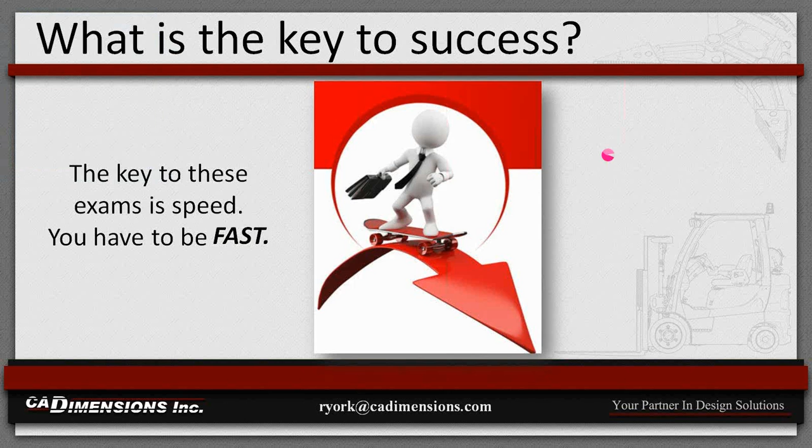And here's the thing about being fast. When you're trying to be fast, sometimes the first thing you do is you kind of start to cut corners. And we have to remember that the key component of speed, the key component of fast modeling is you have to be patient and you have to do it right the first time.

That's what we're after. So I'm going to teach you kind of a 4-step process, how I take my tests and how I help myself ensure that I get it right the first time. Okay.

So step 1 is going to be design intent. And when I say design intent, what I'm after is I want you guys to read through the entire question set. It depends on how many questions it could be. This part alone, just reading the question set, this could take you 3, 4, 5 minutes.

And the reason I want you to read through the question set is because what happens here is they're going to give you a model. They're probably going to start with something pretty simple, actually. And then they're going to mimic the design process, and they're going to complicate it over time. So when they complicate this thing, you have to kind of know where you're going. It's more important to know where you're going than where you're starting.

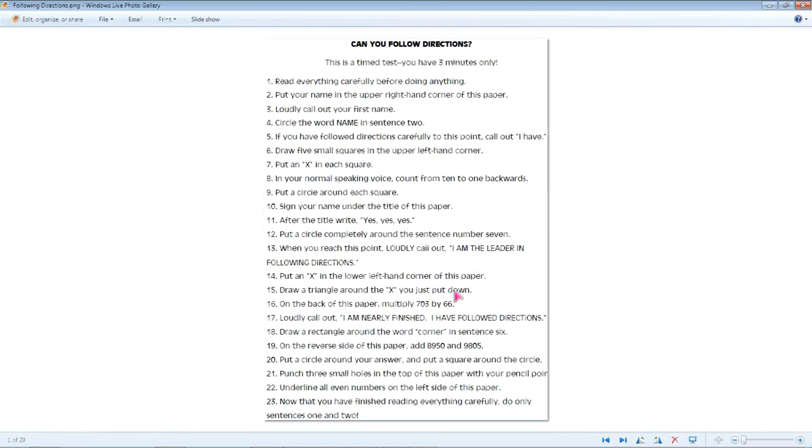So remember, think back to, I don't know, like 7th grade, 6th grade maybe, whenever you did your first real science experiment, and the teacher gave you a lecture about following directions and how it was super important that you read them all the way through the first time.

Same concept here. So I was the kid who got this test after that follow directions lecture, and step 1 is read everything carefully. But then at step 13, I had forgotten about that, and I was bored, and I started screaming in the middle of my classroom that I was the king of the universe. And then I realized when I got to the end that all I was supposed to do was put my name on the paper and be quiet.

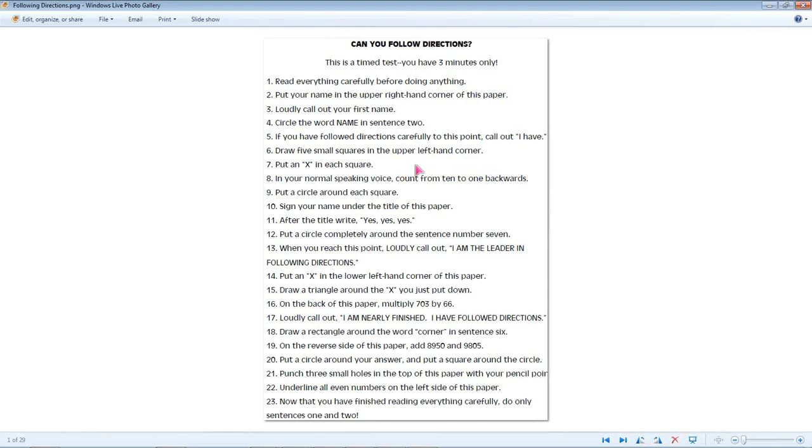So I don't want you to be the guy in the middle of your office that starts screaming at SOLIDWORKS because you didn't see the curveball coming. So read through the entire question set and know what they're going to ask you at the end.

Step number 2, I want you to input all possible information. They're going to give you a box, which is length times width times height. A, B, and C are going to be your variable values. When they give you A, B, and C, use your equations folder and set up global variables for those so all you have to do is change that box. Like I said, we're going to do a live practice test and look at that.

When you input this information, the other key factor is you need to make sure you get your materials properties in the part file.

I showed you 2 weeks ago where I had a really hard time with the mold tools test. When I took this test the first time, I had a hard time with imported model repair. Second time too. Third time, I knew imported model repair, I knew how to do it, my model was perfect. But I got so excited that I knew the content that I forgot my procedure and failed to assign a materials property to my part. So no matter how good my model was, my answer was incorrect because they asked for mass and I had failed to assign material to it.

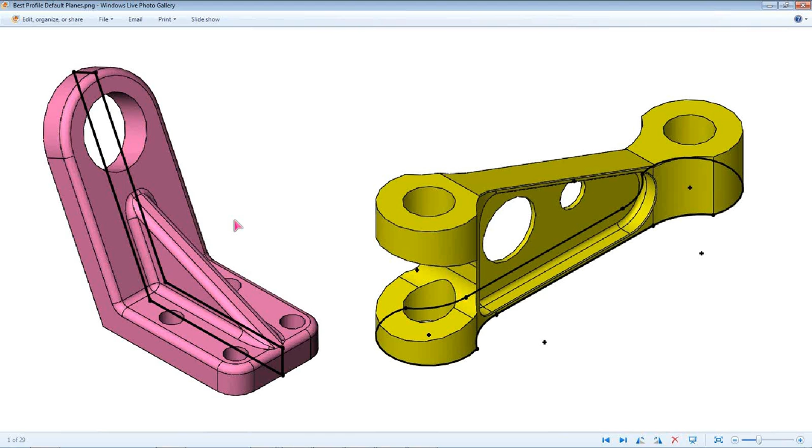And the second part of this is your default planes. When you put this in SOLIDWORKS, I don't want you to waste any time in translation. So if they give you an isometric view, make sure you match it. For this gold one, start on the top plane. For this purple one, start on the front plane. Make sure that you are literally just copying the information they give you so that you don't lose time trying to translate your front sketch to their top sketch or vice versa. Just copy the information they give you. It'll save you time later on.

Finally, 10 minutes into the test, you can begin construction of your model. When you construct your model, I want you to extrude everything you can first. Extrude, extrude, extrude all the solid material that you can. Once that's all created, start making your cuts, start removing stuff - cut, cut, cut, maybe use your hole wizard tool if you need to. Then, once all that's done, fillets, chamfers, that kind of stuff. Add your applied features at the end of the tree.

The reason I show you these is because when I bring up my practice test, some of you are going to look at it funny and say, that's a really easy practice test. And that's probably true - my model is not complicated. But I didn't want my model to be complicated. What I want you to get out of the next 30 minutes isn't how to be the best, most complicated model maker ever. I want you to get the test down. I want you to see how the process I've set up is going to help you be successful at the test-taking part of this.

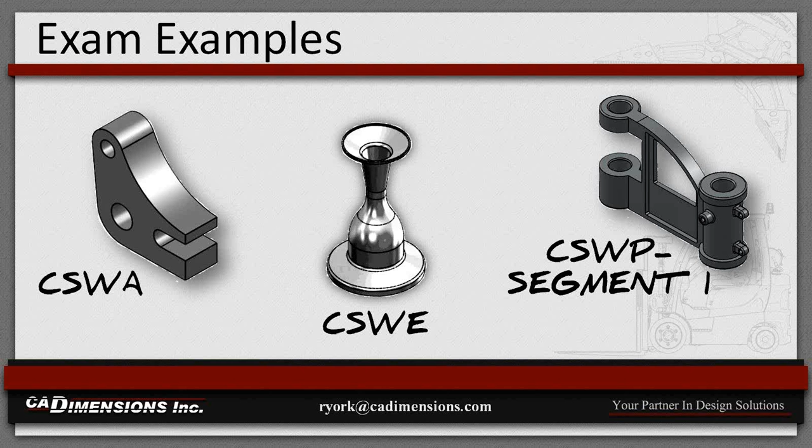And so I'm going to go ahead and bring that up. I'm going to bring up SOLIDWORKS.

So the place we're at in time right now is we have gone ahead and purchased our CSWP. We did that with our subscription services voucher, and we've logged into our proctor, and we've gone ahead and chosen that test to start and hit the play button.

When you do that, you're going to get a welcome screen. Welcome to your test, here's some information about it. Your exam is 5 questions, you can answer them in any order you prefer. Once you click End Test, you can't go back. I think that's awesome. And the way this one is structured is 5 questions, 20 points apiece, and we need to get 4 out of 5 correct in 30 minutes to pass. The reason I structured this test this way is because that's how every single practice test I found online was structured. So whenever you're looking at these practice exams, they're all pretty much going to be built the same way - 4 out of 5 in 30 minutes or less.

The other part of this is I have a timer, and we are going to time this, make sure that we're good to go. So 30 minutes on the clock, we're going to go ahead and start this thing up and see how we do.

We're going to start that. First rule: read through the question set, see where you're at. So we're going to start the test, and we're going to look at the questions.

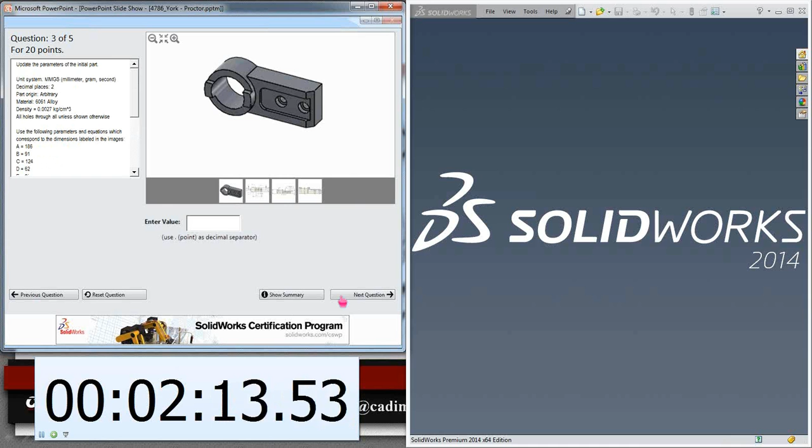For question number 3, you won't believe it, it's the same model again. All they're going to do is update those variable values. Okay? So same model, questions 1, 2, and 3.

Questions 4 and 5 is where it gets fun. This is where it gets interesting. So for question 4, this is where they start mimicking that design intent, or that design process, excuse me.

So what the instructions here are going to be: modify the part using the following dimensions. They're going to give you some detail views of where they made these changes. And then they're going to give you new variable values.

And this is not a reading comprehension test, okay? So whenever they change something about these drawing views, they're going to make sure they tell you. So in this case, hey, by the way, the equation for y has changed. They're going to make sure they tell you that.

And the question, again, is going to be measure the part after you make all these changes. What is the weight in grams? Okay. And then question 5, another multiple choice question. So that lets you know that question 5 is going to build upon it.

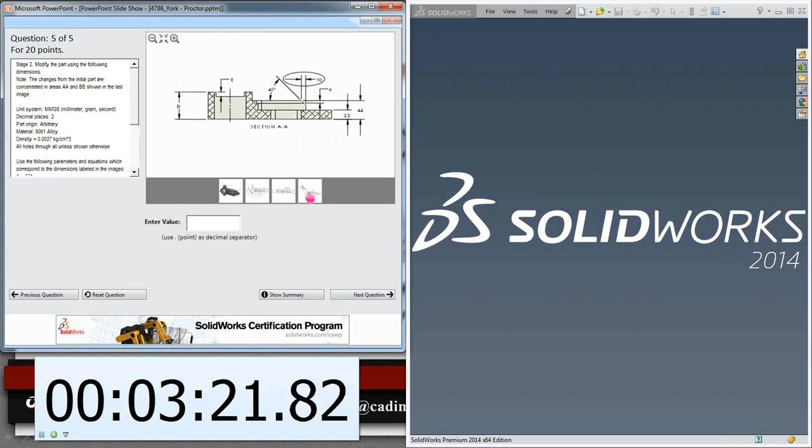And question 5 is going to be fill in the blank. Same part as question 4. And we're just going to make those variable changes and move on.

When you read through your question set, it is super important that you take a look at the summary screen. So the summary screen, in this case, is just an image. Obviously, we haven't answered any of the questions yet.

But how this works is going to show you a state. So is it answered or unanswered? And more importantly, it's going to show you how the questions are weighted.

So if you have a 5-point question and several 30-point questions, take the heavier questions first. Start with those models. And the reason being is you want to set yourself up for success. If you waste too much time on those 5-point questions, then you don't have time to finish the 30-point questions.

So start with the heavier weighted portions of the test, and we're going to go back to question number 1, and we're going to start the rest of our process.

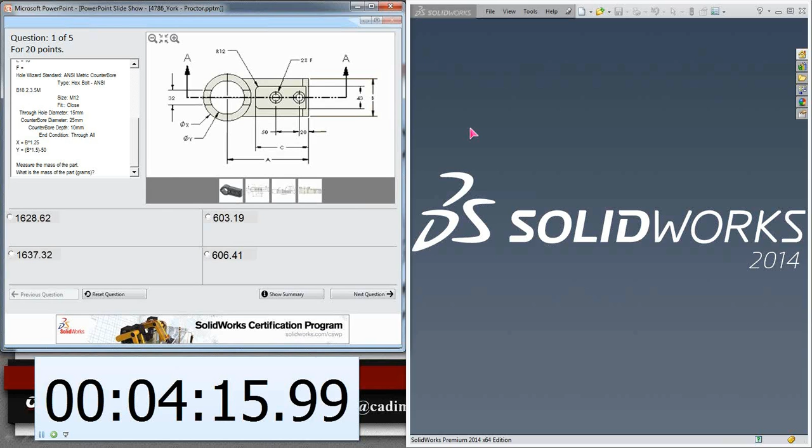So step 1 was read through the question set. We did that, it took us 4 minutes. Step 2 is going to be to create our part and then input all of that variable information they give us. So we've started our part.

Where do we put that variable info? So what we're going to do is I'm going to kind of scroll this back up and look at my variables. And under my equations folder, I'm going to right-click.

And I'm going to say Manage Equations. This is where I'm going to set up those variables.

So A is going to be 172. B is going to be 77. C is going to be 104. D is 62. I'm just using the tab key on my keyboard, by the way. So F, I can't put in here - I can't put the variable for F in here because it's a hole wizard hole.

But I can input X and Y. So X is going to be B times 1.25. And Y is going to be B times 1.5 minus 50.

Okay, and if we remember right, that equation for Y changed at question 4, right? They told us - they put a note there. So if you're really paying attention, if you're really on the ball here, you can say this changes at question 4. Just kind of give yourself a reminder. We're going to say OK.

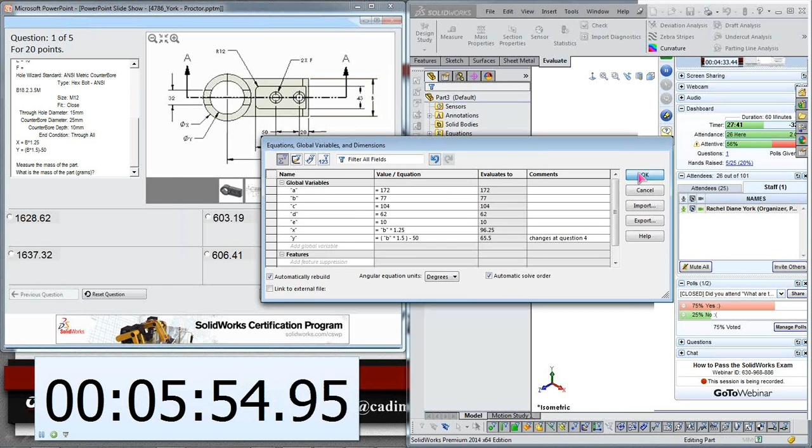So we've read through the question set. We have input all of our variable information. We need to apply a material. So it was 6061, if I remember right.

I'm going to come back to my proctor, kind of move around there. 6061 happens to be in my favorites, so I'm going to assign that and save the part. That's the last step of the input process.

I'm going to save this as - I went ahead and set up a folder before I started taking my test. You can absolutely do that so you have a place to save all this stuff. I'm going to save this as question 1.

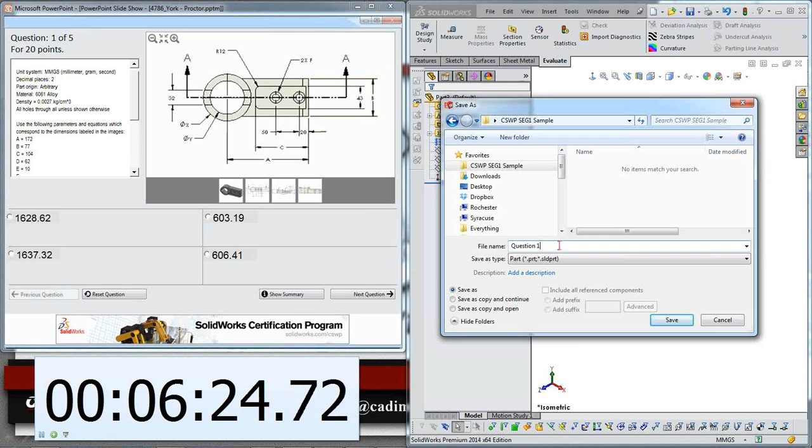Okay, and now I'm going to talk about best profile. Where should I start? I'm going to start with the cylinder. I feel like that's the easiest way to do it. They gave me an isometric view, so what I'm going to do is copy that isometric view.

So I'm going to start on the front plane with my cylinder, start a sketch. I'm going to use my mouse gestures for this, guys, so I'm going to right-click, drag, and start my circle. And I'm going to make this cylinder, the outside, equal to that variable of X that we created.

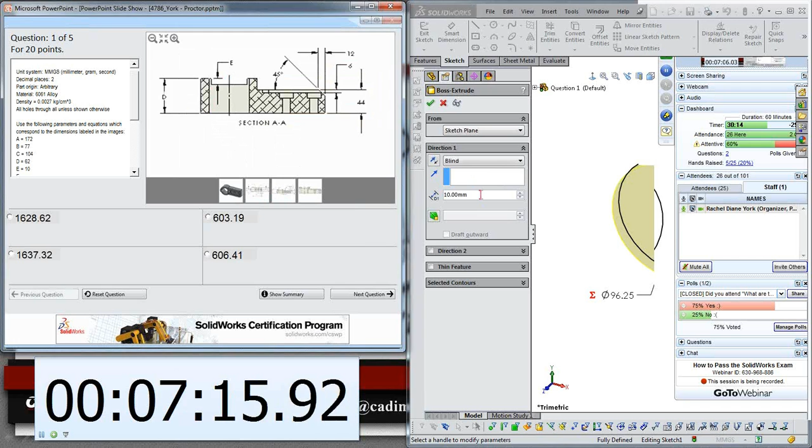Say OK. And now I'm going to go ahead and extrude this up. I have to go back to the proctor, and I have to figure out how tall that cylinder was. So that cylinder was equal to that variable of D. We're going to say OK.

And when we're constructing things, all of our solid material first, right? So I'm going to start another sketch back here. Draw what you want. Make sure you relate it, and then put your dimensions on it. So I'm going to make this midpoint, make sure that it's symmetrical. And then I'm going to put my dimensions on it. This is going to be A, so equal to A.

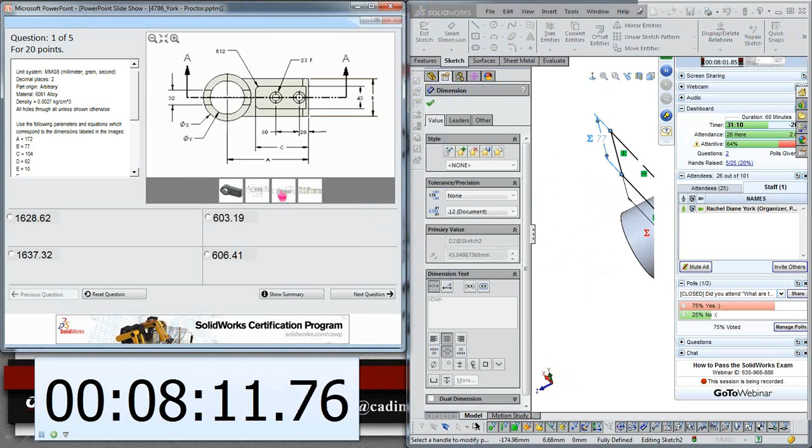And then if I move this over, this is going to be equal to B. Okay, we're going to extrude that up. I don't remember how tall it was, so I got to go back to my proctor, check that out. So that's how this works - you're going to be back and forth between SOLIDWORKS and your proctor.

Okay, and now we have all of our solid material that we need, so it's time to start making those cuts. Again, I'm going to start with the easy cuts - I'm going to start with the cuts on this cylinder. So I'm going to start a sketch here. All cuts are through unless otherwise specified. So I'm just going to draw my circle in here. I'm going to make this equal to Y.

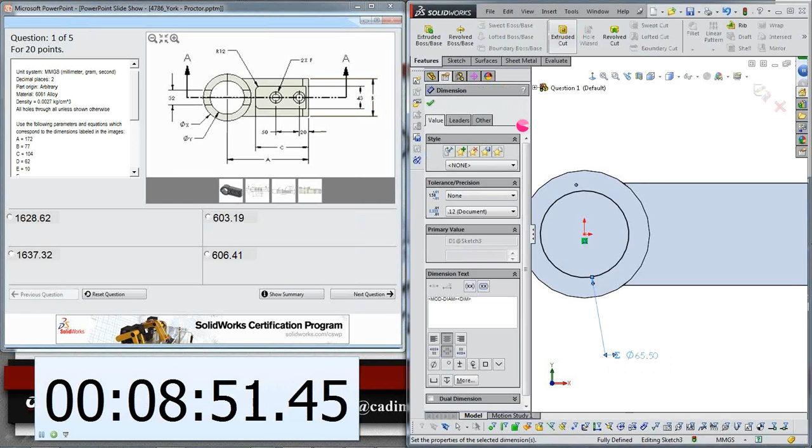Okay, come to my Features tab, do a Cut Extrude. We're going to push this all the way through and say OK.

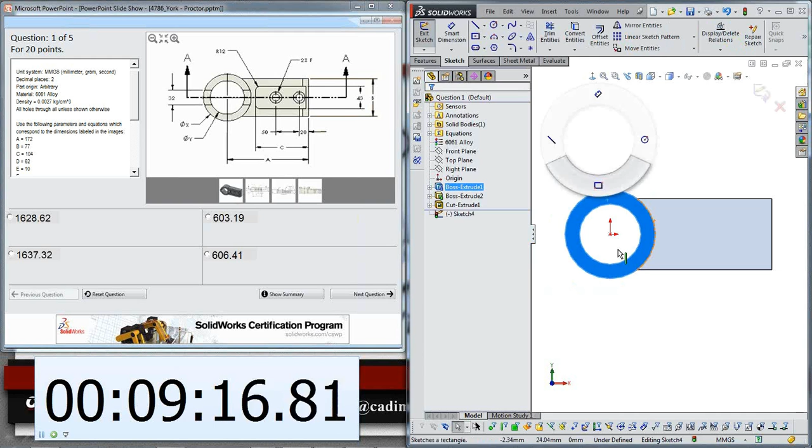And the fun cut here on this test is this half moon. How do you create this half moon? So one of my favorite buttons in the Property Manager allows you to keep the material within the sketch instead of cut it away. So when I start this sketch, what I can do is actually just use that rectangle in the middle, the one they give me that 32 value for.

I'm going to make this tangent. So draw what you want, make sure you relate it, and then put your dimensions on it. This is going to be 32.

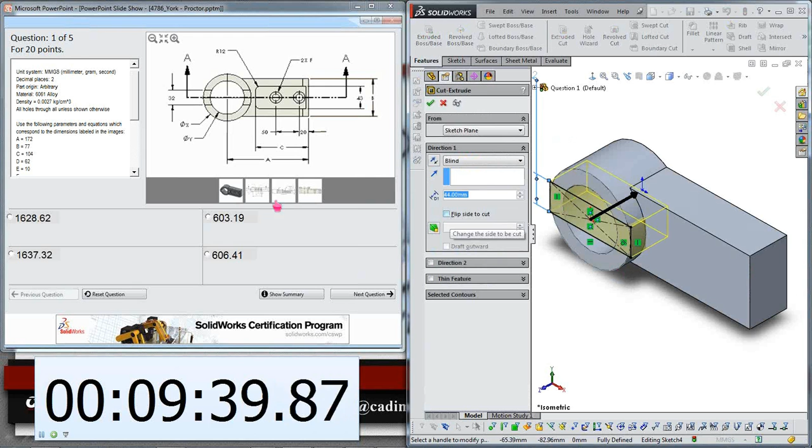So I have a fully defined sketch, and when I go to cut it out, what happens when I cut this out of here, it cuts away the box, but there's a checkbox here to flip and cut outside of the box. So I need to know how deep this is going to go. This is going to go equal to E, and I can cut everything outside the sketch instead of inside of it.

It's going to save me a lot of time making a hard sketch. Remember that you can sketch what you want to keep instead of what you want to cut away, and just turn on that checkbox.

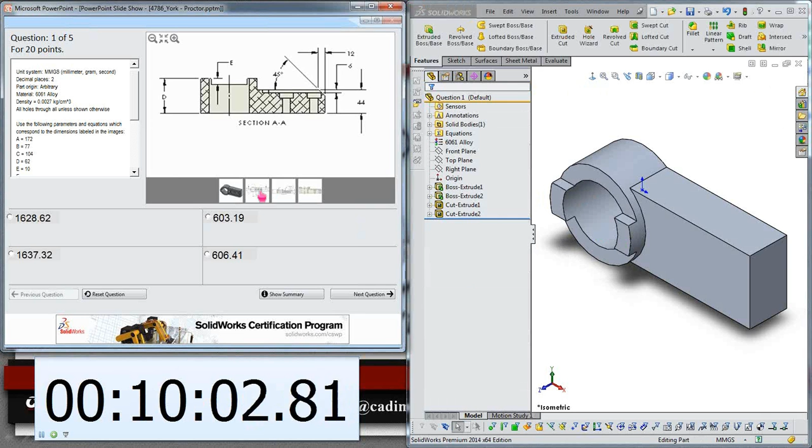The next cut we need to make is going to be this ledge. So I'm going to start a sketch here, use my rectangle tool again. I really like my rectangle tool. Draw what you want, relate it, put your dimensions on it.

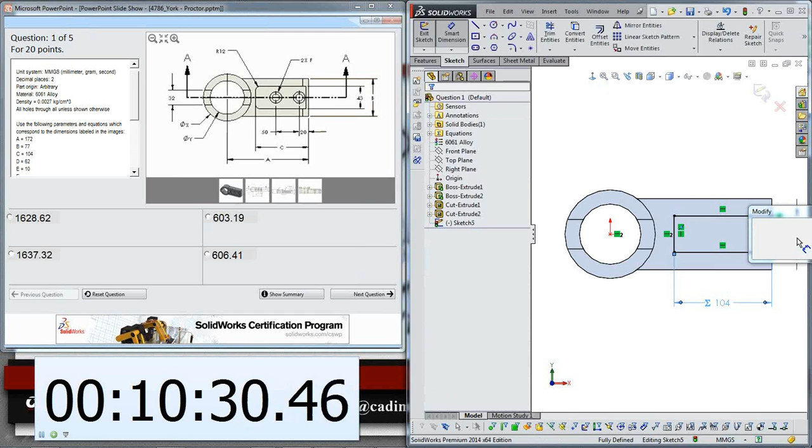So this is going to be equal to C, and then this is going to be 43. Come back to the proctor.

We need to figure out how deep this cut is. It looks like it's 6 millimeters. We're going to extrude a cut, make it 6, say OK.

Not too bad, right? So that's how this works, back and forth between the proctor and SOLIDWORKS. The next thing we need to do is put our hole wizard holes in here. So again, that was a variable we couldn't input, so we're going to start our hole wizard tool.

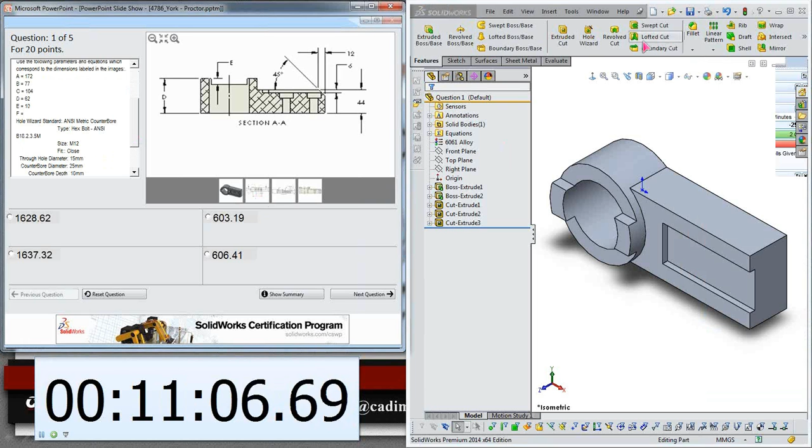We're going to scroll down a little bit. It's going to be a counter bore for a hex bolt, an M12 close fit with some custom sizing. So we have our counter bore option, our hex bolt option, and M12.

We're going to do a close fit with some custom sizing here. So all they want to know is that you know that you can turn on that checkbox. We're going to go through all and then put our sketches here.

I'm going to go normal to because it's easier to grab stuff when you're in 2D if you're normal to. I'm going to make these horizontal, draw what you want, relate it, and then put dimensions on it, and we're going to go 20.

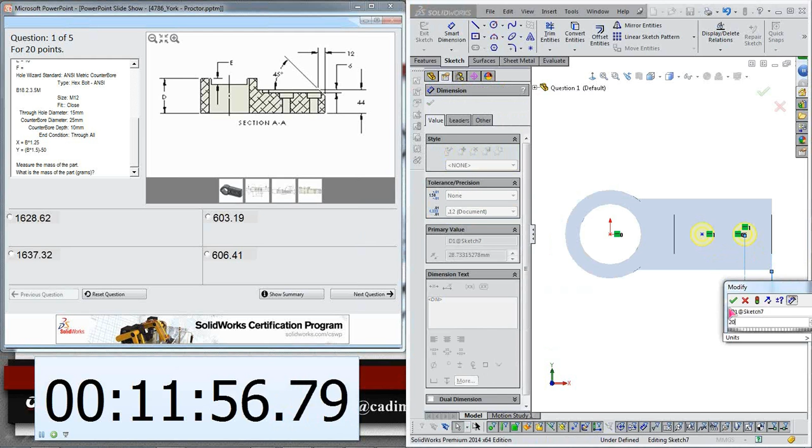I don't remember what the other one was. 20, 50. Okay, our sketch is fully defined, so we can exit out of here, say yes.

And now all we need is fillets and chamfers. So the fillets are 12 millimeters here. We're going to go constant. We're going to make that 12.

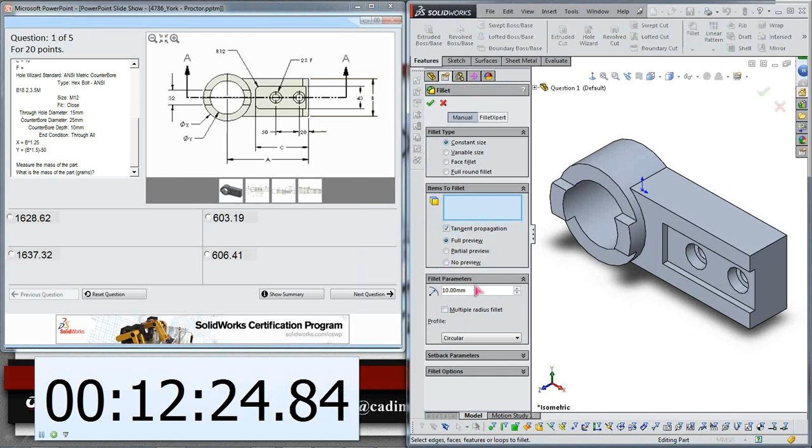And guys, we're almost halfway through our test, and that's to be expected because we need to create a good first model to move on. Okay, so we're going to say yes to the fillet.

We're going to go ahead and throw this chamfer on here. It's going to be 12 by 45. I'm going to pick my edge. I'm going to say yes.

Okay, I'm going to save my part, and I'm going to go to evaluate and do mass properties. And it's 1628.62. So that tells me that I'm right on, and that's where I should be. So if you don't get the exact result for the multiple choice questions, you need to go back and reevaluate.

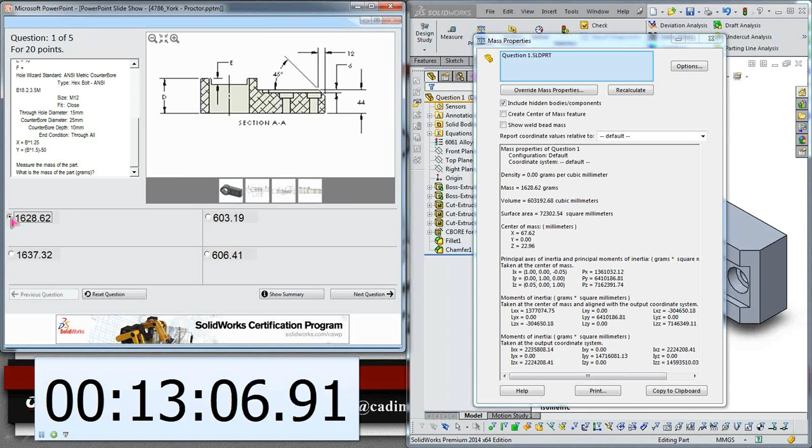You need to be dead on, because remember the next two questions are progressive. So I'm going to choose my answer here, and I'm going to go to the next question.

Save a part per question, so we're going to use that awesome new Save as Copy and Open feature. We're going to save this as question 2 and say OK.

And now, to make our changes to question 2, it's as simple as right-clicking equations, and because we spent all of that time creating a solid part, we gave ourselves a good foundation, we built a good editable model.

All we have to do is come in here and change these values and move on with our day.

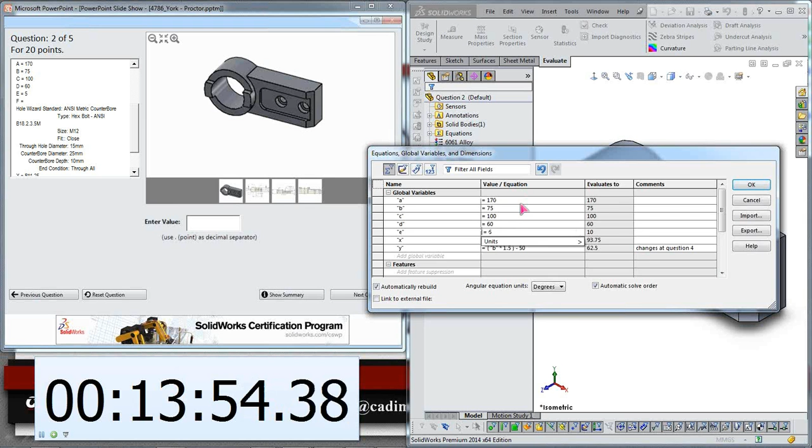Okay, so this one's going to be 5. My equations haven't changed yet. They don't change until question 4. We're going to say OK. Our model's going to update, and we're going to do mass properties.

Don't come over here and type this in here. If you miss something, make sure you miss it for real. Don't fat finger something and miss it. So copy that out of there and paste it in. Go next question. So you see how fast we're getting all that time back.

So same thing for question 3. We're going to save as a copy, and we're going to open up question 3, do the same thing, edit our variables, get our new mass, and go to question 4.

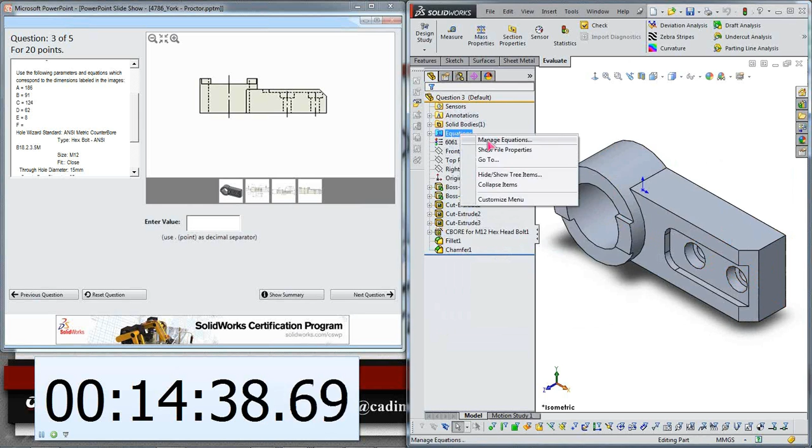So I'm going to say manage equations. I'm going to type this in here. I'm sorry, guys, I'm not a good type and talker. One thing at a time.

It's going to be 62, and we're looking at 8 here. I'm using the tab key on my keyboard, and if I over tab, I'm just holding shift down and hitting tab again to get back to where I was.

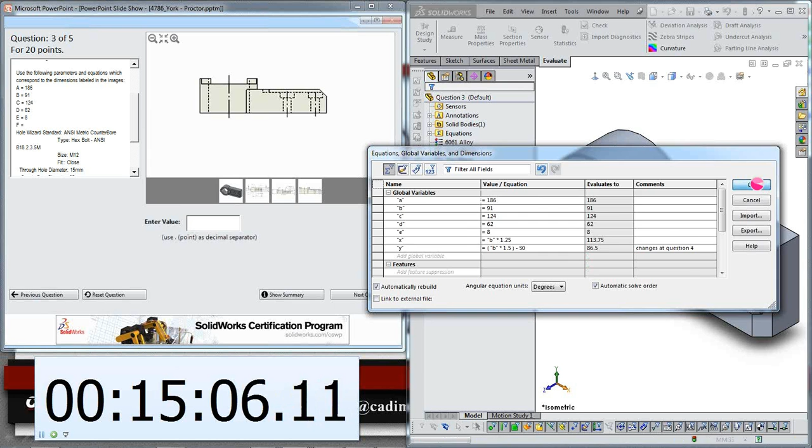For question 3, we're going to do mass properties. Again, copy this out of here. Don't fat finger it. Make sure if you miss it, you really missed it.

So for question 4, we're going to save as a copy. We're going to open question 4 up, and it's time to start making those changes.

So we're halfway through our test, so we only have a few minutes to get this thing modified and move on. Okay? So when you get to this point, sometimes it's kind of scary because you're like, man, I burned half of my time already. What you need to do is remember to find that order in the chaos.

When you start editing this thing, don't just start clicking at stuff. Make sure you roll the tree back and edit it properly so that it will update for question 5 the same way we had such success with questions 2 and 3.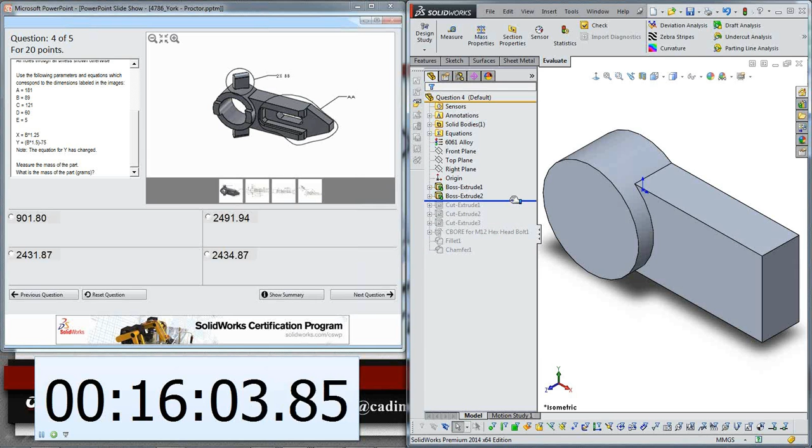So I'm going to use my rollback bar. And for those construction rules, it was add all of your material, then cut away, then do fillets and chamfers, right? So we need to add new material. We need to add these wings, and we need to add this step. So that's exactly where I'm going to start.

I'm going to roll back to my last material addition. I'm going to start adding stuff. Maybe use my normal to key again so I get the exact same view they have. Don't waste time getting lost in translation. Just copy exactly what they give you.

Okay, so when you're sketching, sketch what you want. Relate it up. We're going to make these horizontal and put our dimensions on it. It's going to be 60, and this little point here is going to be 20.

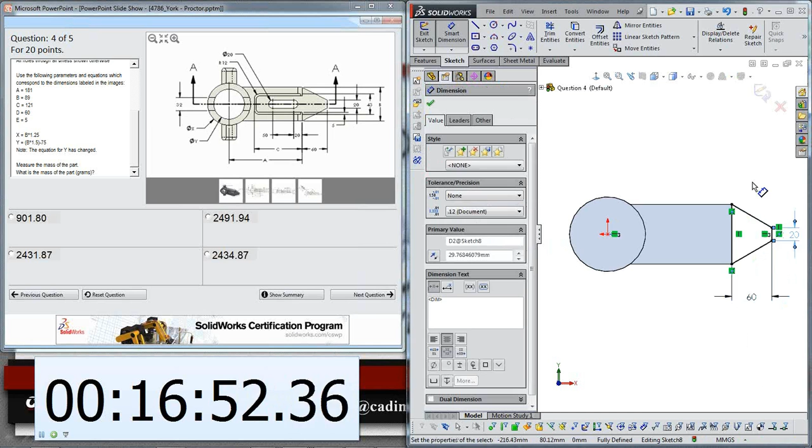My sketch is fully defined, so I can extrude this up. I don't remember how far it's going to come up, so I got to go to my different view here. It's going to be 22. I'll flip it back in, say OK. So we've added that material.

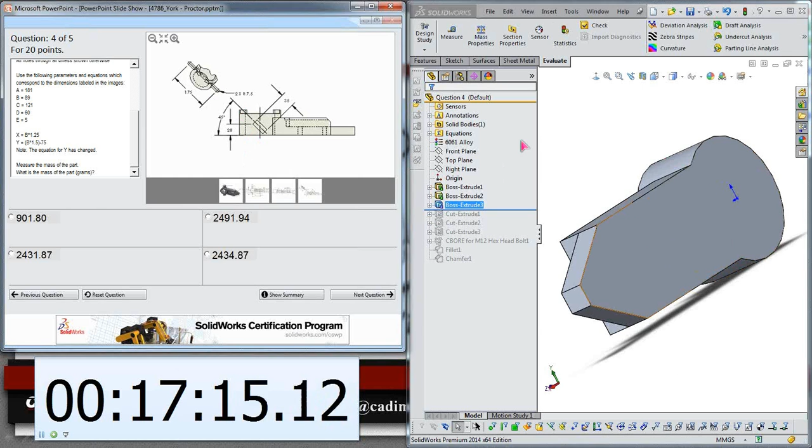So the next set of material we need to add are the wings. So it looks like 175 center to center on kind of a 45-degree angle. That's kind of hard to draw. That's going to kind of overwhelm you at first. So make sure you break everything down into its simplest forms, its simplest pieces.

So a slot is just a rectangle with 2 circles on the end, right? And then in this case, make sure you again use the information they give you exactly the way they give it to you. So I'm going to start on the top plane, make sure I match the view they give me. I'm going to start a rectangle. I'm going to use my A key on my keyboard, kind of draw that shape out.

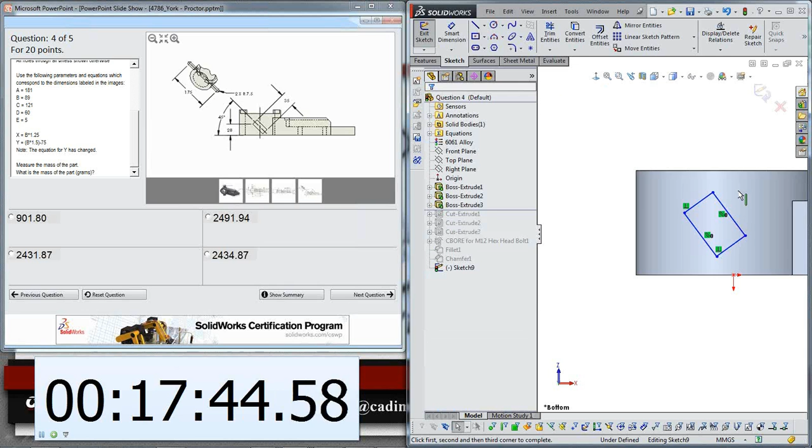If they give you construction geometry or information like that, make sure you go ahead and draw it in because it probably serves a purpose. They usually don't just put extra material or extra stuff in the sketches that they give you. Okay, put your dimensions on here.

It's going to be 28. Oop, must have had something picked. There we go. For some reason, I just missed that line a couple times. That happens. It's going to be 28. This one is going to be 35.

Okay, and what happens here is I'm missing a couple of dimensions. They're going to give you a width dimension as a full round on every test I've taken, I think. And I think they kind of do this to mess with you. So the width of this rectangle is going to be 7.5. It's going to be this radius, right? So just make sure you're looking for that. If you know that there's a dimension that you're missing, check it on a full round. It's got to be somewhere.

And then we're still underdefined. So what happens a lot of the time on these tests is they kind of infer something, they suggest something. So in this case, what they're suggesting is that the middle of this rectangle is coincident with the middle of that cylinder. Okay, so make sure you get the inferred kind of stuff. Make sure that your sketches are fully defined before you move on. That's really important.

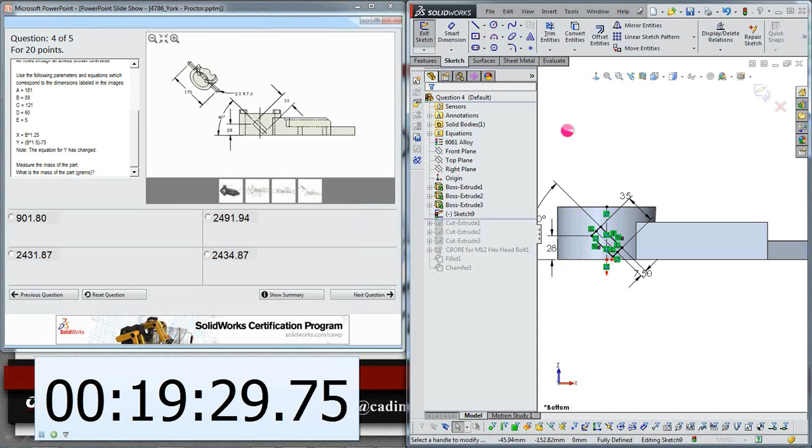They probably gave you all the information that you needed to fully define it. Just remember that, it's there somewhere.

Okay, so I'm going to extrude this out. I'll use my mid-plane end condition, and make sure that I stay symmetrical.

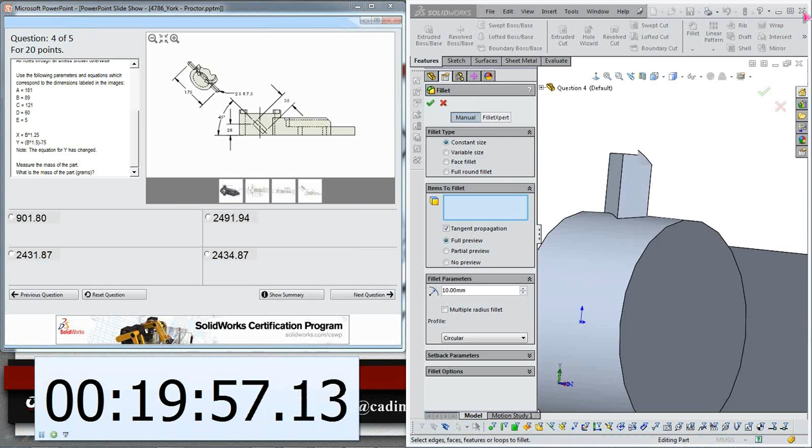My first instinct here might have been to open up my fillet tool and use the full round tool. I don't know if you guys have used that at all, but you've got to be really conscious of how they give you the information. So if I come in here and use my full round tool, I really like this one a lot.

If you haven't seen it, what you do is pick the 3 sides that you want to round, and SOLIDWORKS will go ahead and do that. But what happens here is it removes material. So if that's your first instinct, that's fine.

But in this case, they actually give us the 175 center to center, so this method would only work if it was max to max. So make sure that you really take a detailed look at their dimensions, and the correct, faster way to do it here would just be to break it down into really basic shapes and put the circles on the end of these rectangles. That'll give us the proper dimension that they asked for.

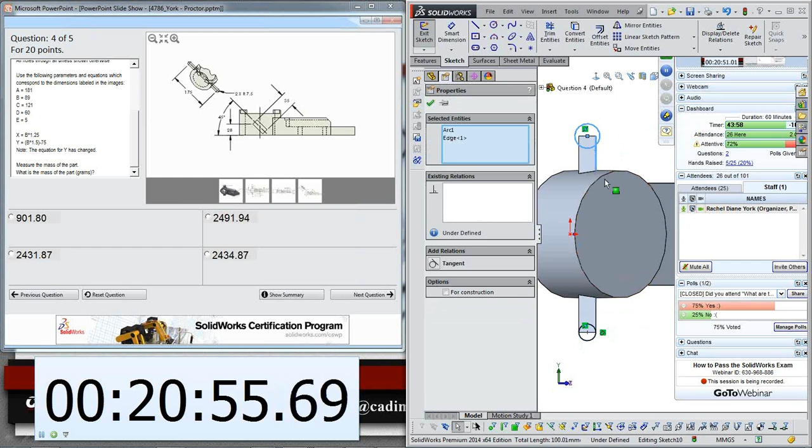So I'm going to make these tangent. And then when you extrude stuff, if you extrude and double click on a surface, it's going to take you up to surface.

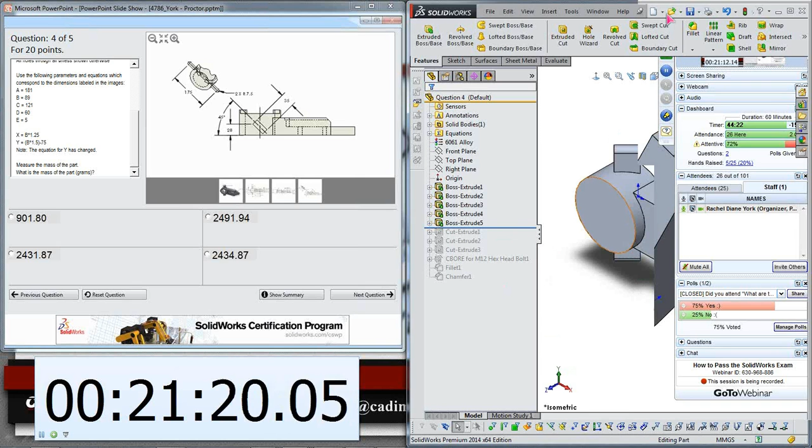So we've added all the material that we need. We're going to use that rollback bar again, and start looking at our next set of features. We have 8 minutes left, so it's getting kind of stressful. But here's the cool part: that hole, same hole, it's still equal to X.

The next one, our half moon, awesome, it's the same half moon.

Our step, alright, things are starting to change here. So instead of having just the plain old step that we had before, what they've done is they've actually put a little recess in here. Maybe there's a lid or something going on it. And they've done this radius of 12, but offset it by 5 millimeters.

So what this means to me is I need that radius right now, I need to offset it. So I'm going to roll down my tree, pull my fillet up to where I need it, where I'm working, and then roll my tree back up. Make sure you're really focusing on those basic best practices.

Now I can start my sketch. I can offset, go 5 millimeters to the inside. Here's another fun trick for you.

When you offset stuff, I actually need this line to be collinear to that edge. So if I delete that offset relationship, I can drag this now. It turns blue again, and I can go ahead and create that collinear relationship that I need.

Okay, I can extrude a cut. The double click up to surface also works on the cuts, works for everything. It's a good shortcut. So we have the step that we need, and that little recess that they put in here.

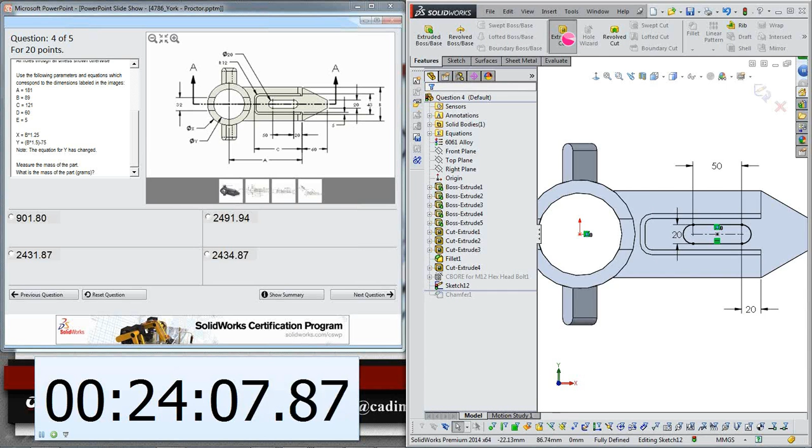Okay, we're going to extrude a cut. We're going to go through all, because all of our holes, everything was through all unless otherwise specified. We're going to say OK.

And here's why the rollback method is king. What's going to happen now when I roll to my chamfer? We're going to get a visual clue, number one, that the changes we made didn't propagate. This chamfer didn't push the same way it pushed on the original edge, so you get a visual clue that something is wrong there.

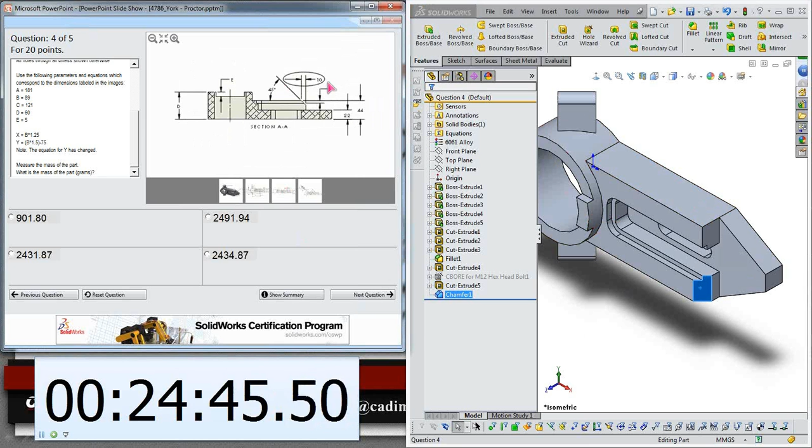And whenever they change something that's not variable in the sketches, they're going to circle it. They're going to say, hey, by the way, we changed this too. So in this case, we need to actually change this to 10 millimeters and grab that other edge. So we're going to say OK.

And our part is complete. Not bad. So we can do evaluate and we can do mass properties. We still got 4.5 minutes. We're good.

207802. All right, this is where you're going to panic. This is where you're going to freak out. This is where I freak out every time. Don't forget about the order and the chaos.

So that 4-step process was to read through the questions. We did that. When we get to the model, though, we have to input our information. I got so excited when I started modeling question 4 that I just immediately jumped into changes. I failed to input the new variable values. So make sure that you input every time.

Okay, so I'm going to manage my equations. I'm going to go ahead and change this information to what it needs to be. Race against the clock here, see if I can type fast enough. 121 and 60 and 5. And then, oh yeah, that equation for y changed at question 4.

Okay, so this is going to kind of force you to review stuff a little bit, and that's a good thing. That's what you need. So we're going to say OK, our part model is going to rebuild.

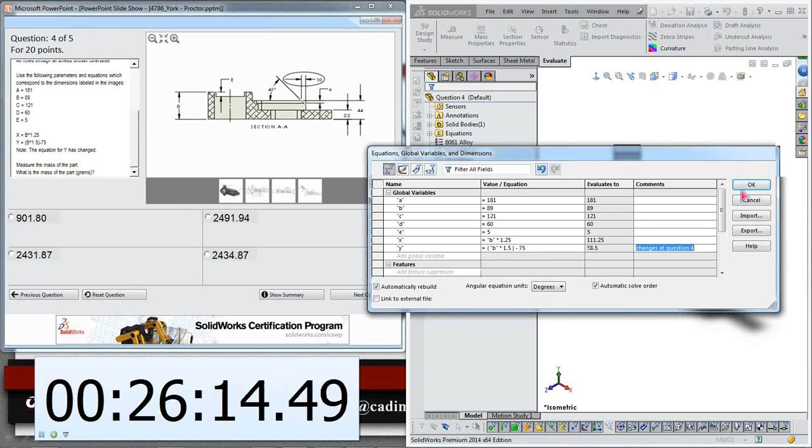Ooh, we're getting really short on time and it's getting really uncomfortable. Let's hope this works, right? So mass properties, 24, 34, 87, perfect.

Okay, so make sure you're dead on these multiple choice questions, because remember that question 5 is progressive. So we're going to say question 5, we're going to file, save as a copy. Don't get sloppy. Don't start cutting corners and just make the changes here. Go ahead and create question 5.

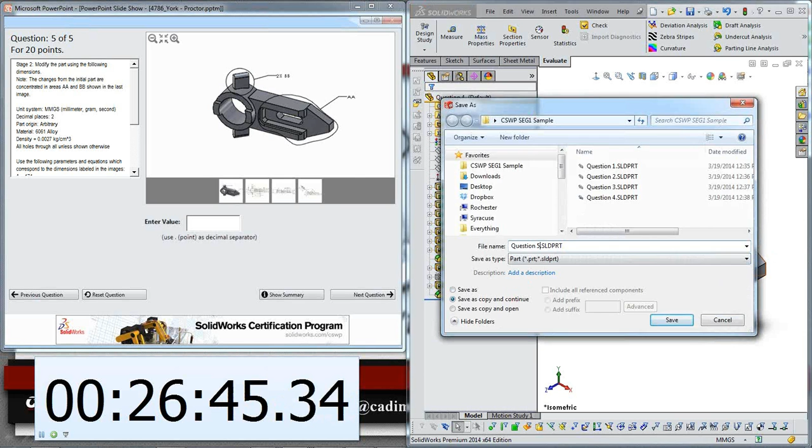Okay. I think I hit the wrong dialogue or the wrong radio button. That's okay. Got my filters turned on. I'm going to go ahead and open up question 5. Like I said, don't panic. Just make sure that you go back to the same part. Make sure you're checking your feature tree. Make sure all that stuff's there.

And for question 5, we're going to go ahead and modify our variables again. This one's going to be 174 and 82. 114. 64. And 10. Okay, I'm going to say OK.

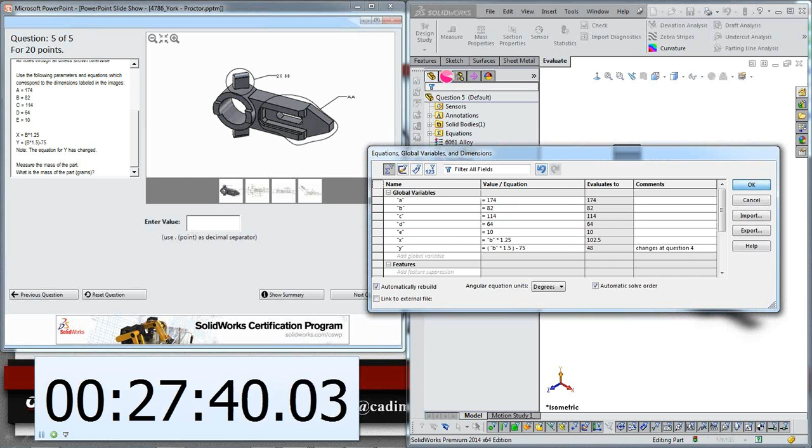And I'm going to do some evaluate mass properties. I'm going to grab this. Remember, don't fat finger it. Just copy it out of here, paste it in. That way, if you missed it, you really missed it. Don't worry about mistyping something.

That's no fun ever. And when you get to this point, you can finish, you can go to the next question. The next question at the end of the test is always going to be that summary screen. Evaluate, make sure everything is answered. This is that point where, okay, we've got about 90 seconds left on our test. Maybe we can go ahead and take a look at those 5-point questions. Maybe we hadn't gotten there yet. Make sure the state of all the questions you approached is answered and that you're ready to really end the test.

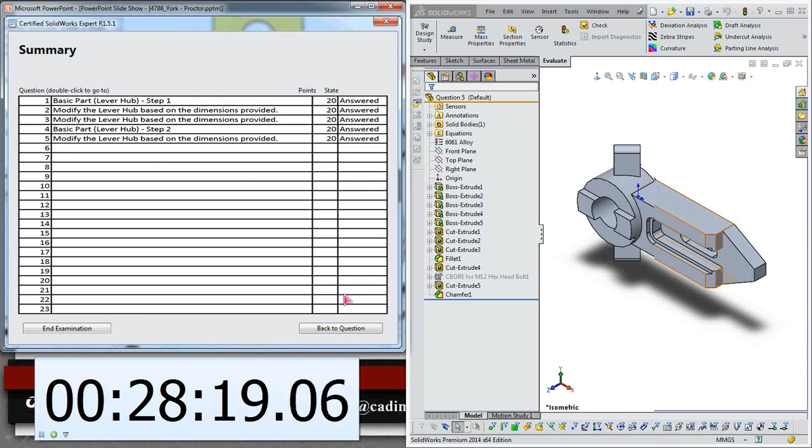And when you end the test, you get a screenshot of how well you did. In this case, we got all of them right. Yay! Okay. And you can share the screenshot on social media. You can do whatever you want with it. Tell everybody. Run around the office and tell everybody.

So what happened to me and what happens to me is I tweet these things out when I get them. And the coolest thing happens: SOLIDWORKS responds. The SOLIDWORKS people, the big dogs at SOLIDWORKS, respond to me and say, hey, that's awesome, or they want to know how the test went. I think that's really cool that they're paying attention to this kind of stuff. So like I said, make sure you tell everybody.

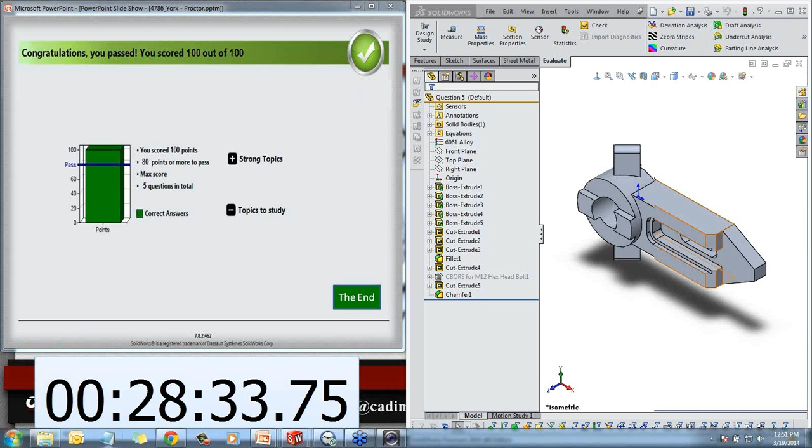And when you pass, okay, because you're going to - let me kill that stopwatch. That's kind of... there we go. Okay, so again, you're going to get... let's go back up here.

So you're going to pass the test. That's going to happen. And when you pass, like I said, tell everybody, scream it at the mountaintops, whatever you got to do. For your rewards, you're going to be the best user you ever have been after you study for these things and pursue them. That's what happened to me. I got 1,000 times better.